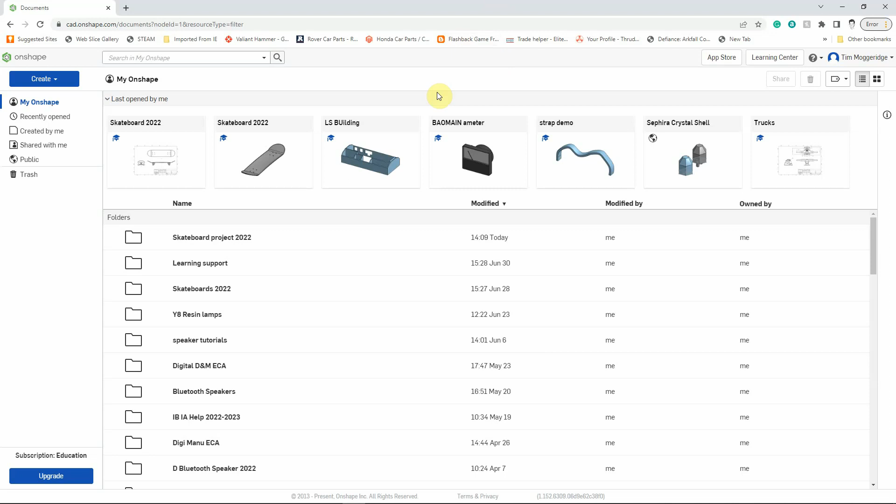Welcome to the third in the Onshape video tutorial series on drawing the C skateboard project at Bryanston School. In this video we're going to make the gasket that fits between the trucks and the skateboard deck.

We'll go into our folder where we've got our previous file saved, open up our skateboard model. We're actually going to use the skateboard model to help us create the sketch for the gasket.

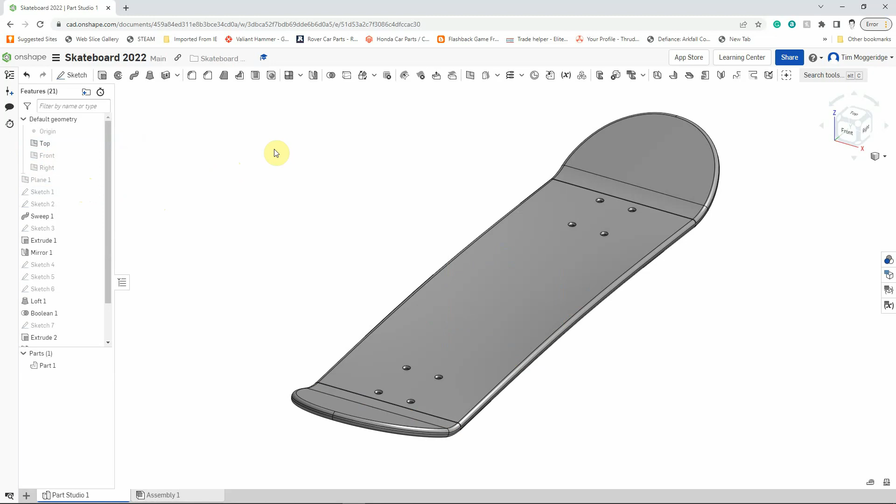The first thing we're going to do is create a new work plane, offset from the top plane. I'm going to right click on the top plane and show it. If you remember in the last video we showed how we could hide them, so you can just about see it's in there, and because we can't actually access it in the model, we'll do it from over here.

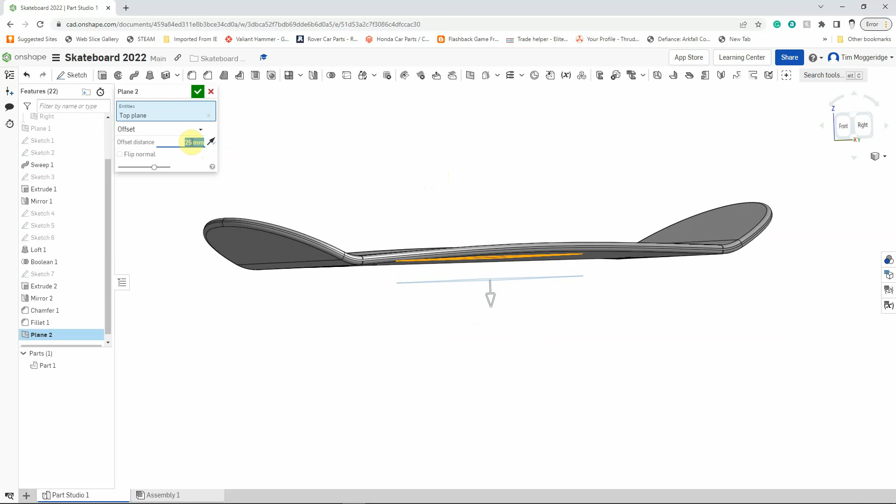We'll right click on it and select offset plane. At the moment you can see it's trying to do it above the board. We want it to go below the deck, so we're going to hit the arrow to swap the direction, and change the distance to 9mm, then left click to confirm.

We're now going to spin that around holding the right mouse button down and select that work plane, right click and then left click on new sketch, or we could do the same over here on plane 2 - right click and select new sketch.

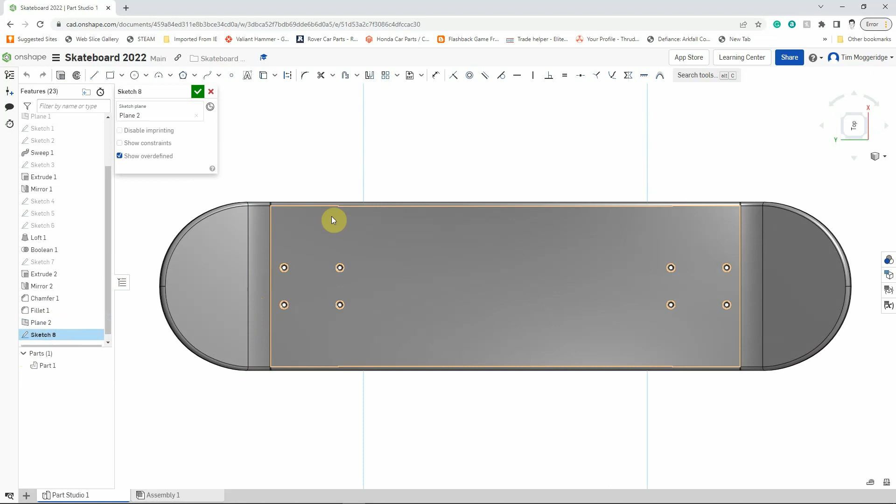Press N to view onto the work plane, and it doesn't matter if this appears with us looking down on the model or looking up at the model from the underside. The process will be the same, so if yours flips around slightly differently, don't worry.

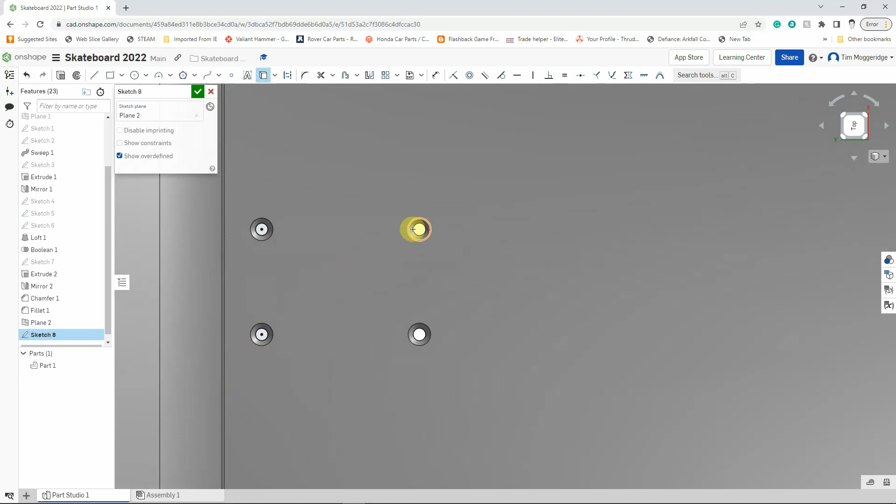The first thing we're going to do is create the 4 holes using the existing holes in the deck on the work plane. So we're going to use the convert tool. I'm just going to scroll in with the mouse wheel, and select the edge of the hole where the bolts or screws go through to create 4 circles.

I'm now going to use the corner rectangle, and just draw a rectangle over those holes. It doesn't have to be too precise. I'm now going to dimension that, so let's use the dimension tool.

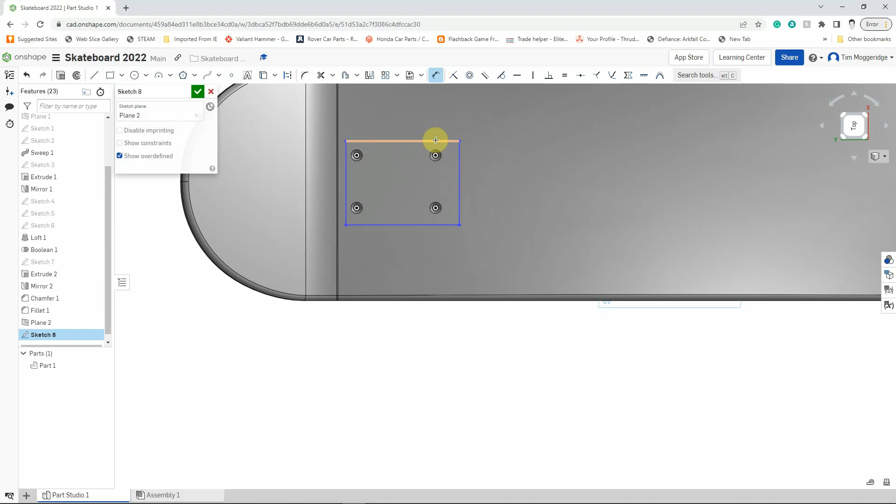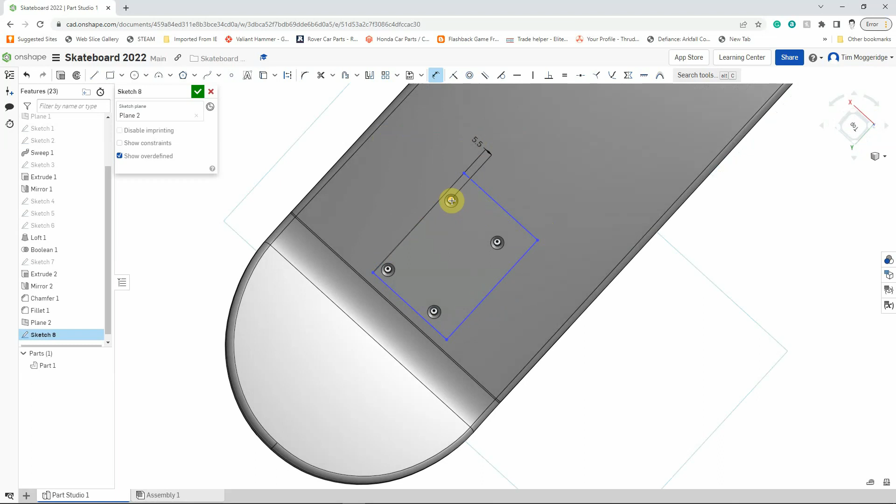If we think of the top left hole here, or top right hole as we're looking at it - if we spin the deck around, this hole here, that's where we're going to take our dimensions from, and we'll go from the center of the hole to the line nearest to it, click to place the dimension, and that wants to be 5.5mm. We'll now do the same with the center of the hole and the line above, and that wants to be 6mm.

We'll now dimension the whole size of the rectangle using the dimension tool, clicking on the 2 sides, and make that 53mm across by entering 53 on the keyboard. We'll click at the 2 short edges to get the length, and that's going to be 75mm.

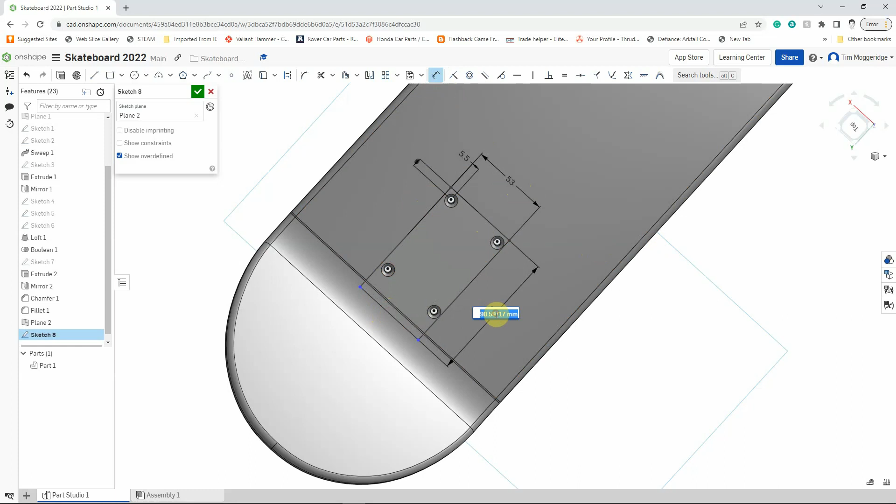Enter. So if I spin this around using the right mouse button held down, you can see we've got a sketch on the work plane that's just below the surface, and we're now going to create the part. Because the deck of the skateboard isn't perfectly flat, we want our gasket to take the shape of the deck.

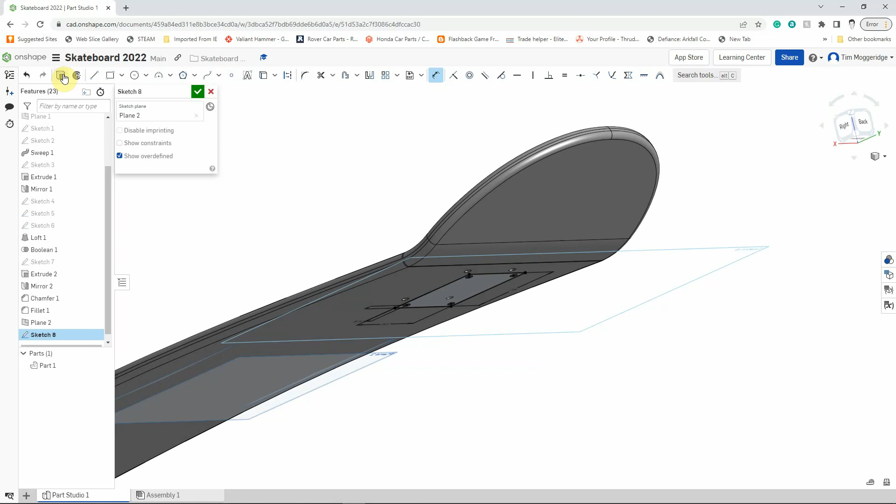So to do that, we're going to extrude this sketch up to the part. Use the extrude tool, create a new part for this, and in terms of the end type, I'm going to left click on there and make that go up to part.

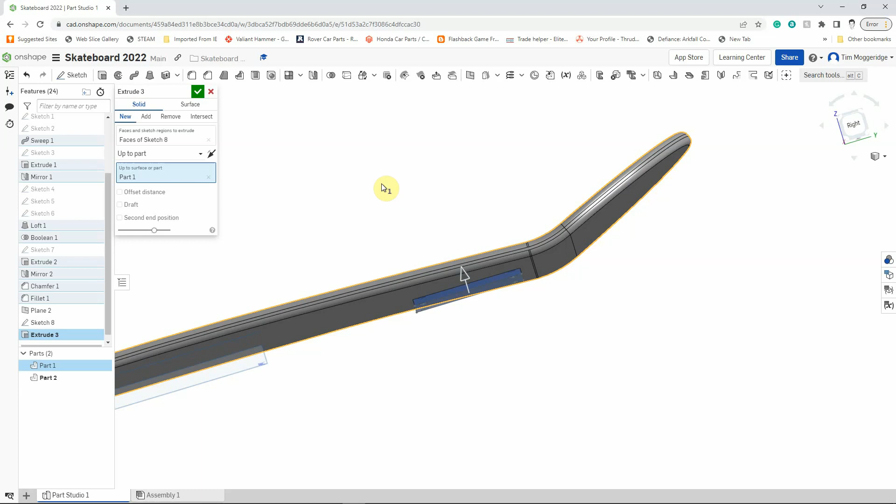If I just spin that around, you can see that we now need to select the part - up to surface or part. In that box, make sure it's highlighted, then we select the deck, and you can see it extrudes up to that part. That's what we want. Left click to create the part.

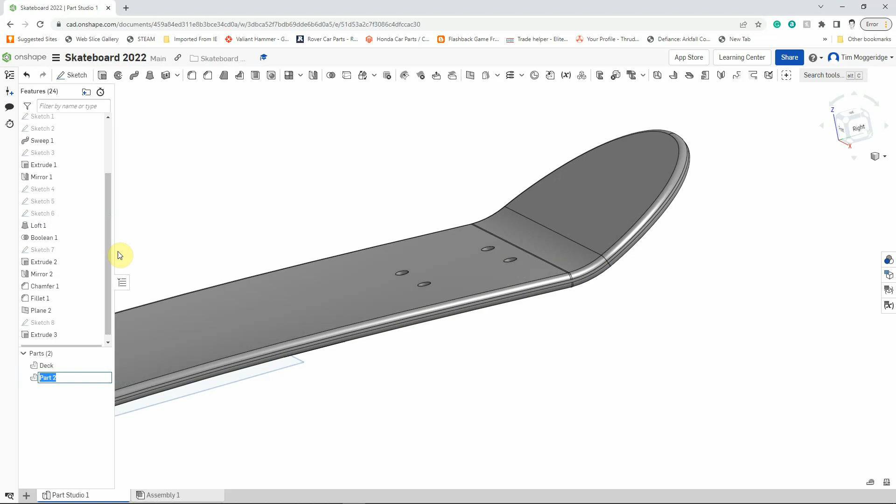So over here now we've got our first 2 parts. Let's just do a little bit of quick renaming. I'm going to right click on part 1, left click on rename, and change that to deck. And part 2, I'm going to right click and rename that, and call it truck gasket.

And while we're doing that, I'm going to rename the part studio as well, because we're going to create another part studio in another video. So I'm going to right click on the part studio 1, rename that, and just call that deck, so it's for the deck parts as well.

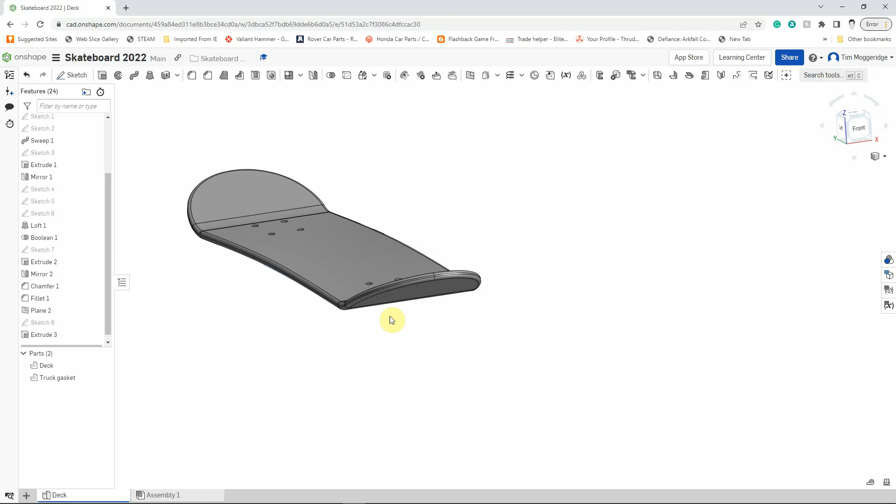And that's it, that's all we needed to do to create that part. When we do an assembly and put the other end in, we just need to flip that around 180 degrees so it fits the same contour of the deck on that side.